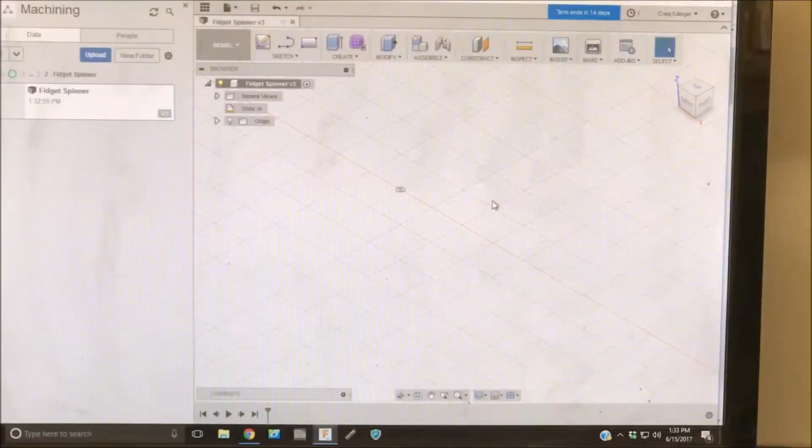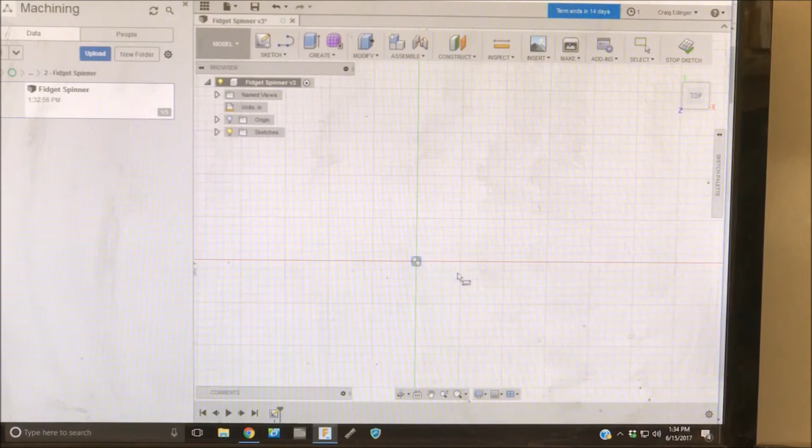Okay, so to draw this fidget spinner in Fusion 360, I'm simply going to go up to Sketch, Rectangle, 2-Point Rectangle, or you can just click anywhere and hit R. And I'm going to select this plane right here. Then I'm going to click in the origin point right there, drag down. Over here, I'm going to go 1.25 tab, and then I'm going to go 2.75 and enter.

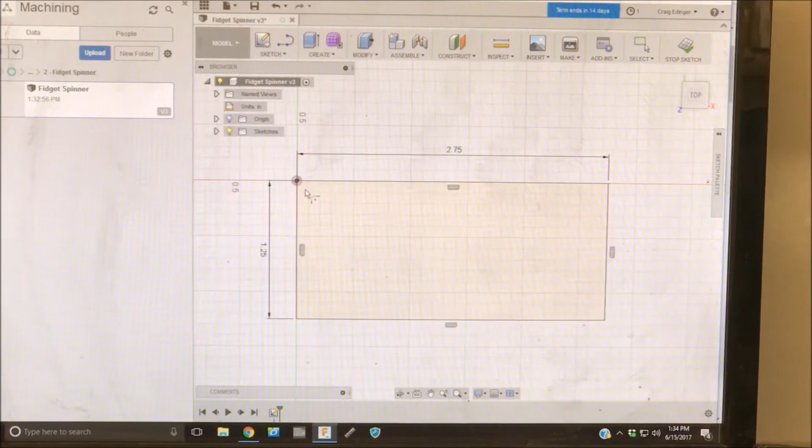Now I'm going to go to Sketch, Fillet, select this point right here, enter 0.625, enter, repeat fillet, 0.625, enter.

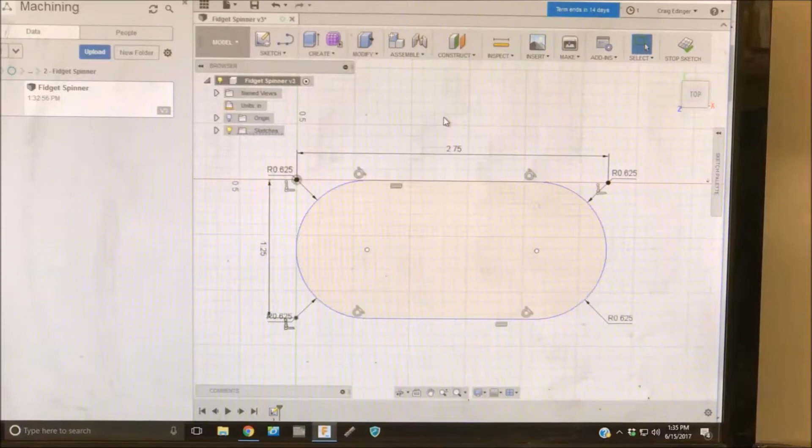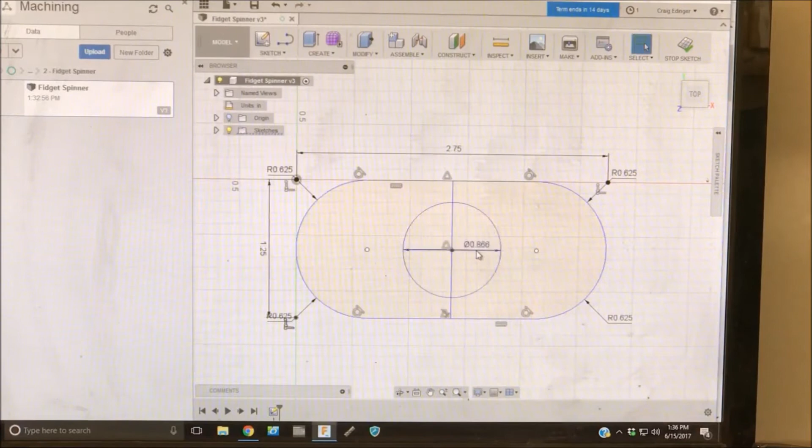Alright, now I need to make the hole in the center for the bearing. So I'm going to go line, find the center point there, center point there. Then I'm going to go C for circle, find the center here. That's going to be 0.8661, which is 22 millimeter. Enter, enter. I'll delete this line.

Now I'm going to hit the home up here, right click, press pull, select here. I'm going to go 0.2756, which is 7 millimeters, the thickness of the bearing.

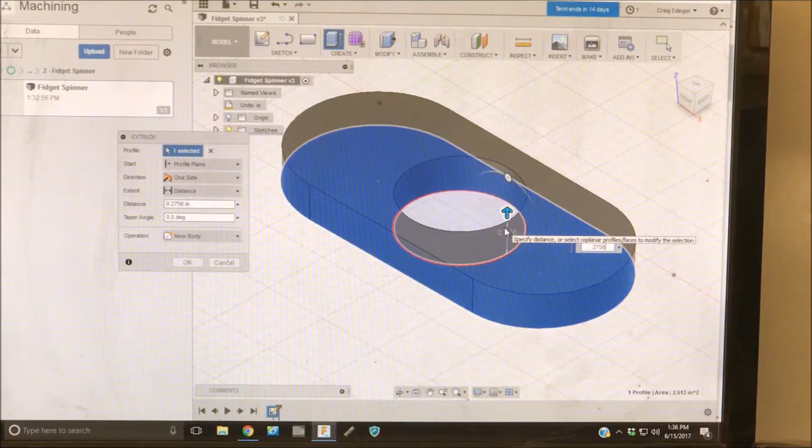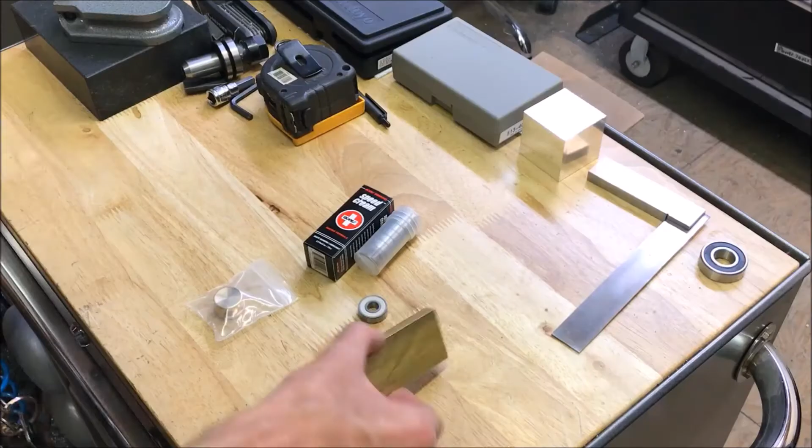Enter. Now to make it look cool, I'm going to go to Modify, Physical Appearance. I already have brass up here, but it's under metal down here, so I'm just going to drag brass onto here and close.

So the parts I'm using in this project is machinable brass. This is 3/8 inch thick by 1.5 wide by 3 inches long. Actually it's 2.9 because I have a 12-inch length that I want to cut in 4 pieces.

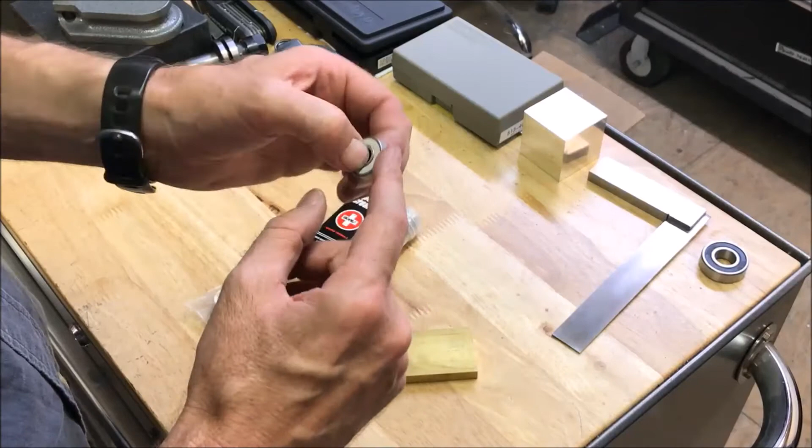Also a 608 bearing. This is actually a hybrid. This is chrome. I wanted to get stainless, but I ended up getting chrome with ceramic bearings. We'll see how that works out. Actually got an 8-pack. My son rides a skateboard, so he gave me some Bones Speed Cream. It's not cream, it's actually oil. I'm going to end up cleaning the grease out of this bearing and putting this oil in instead.

And I got this button. If I had a lathe, I could have just machined this, but I ended up buying it. This is a brass button. It just slides in there. It's the screw type. Like that.

Alright, I got the brass from McMaster-Carr, and this piece here worked out to be about $8. You could probably find this cheaper if you go to like a local metal shop and they have some scraps and stuff. The bearings ended up working out to be $2.50 a piece. You could spend anywhere from like 50 cents up to like $15, depending upon what quality of bearing and how long you want it to spin. The bearing was off of Amazon. The button, I don't remember how much that was, but that was off of Amazon also.

So now I'm going to go into CAM, Setup, going to go into Stock, going to go to a fixed box size, and I'm going to set the width, or the X, at 2.9, and the depth, which is the Y, at 1.5. That's correct. The height, I'm going to put that at 0.375 for 3/8.

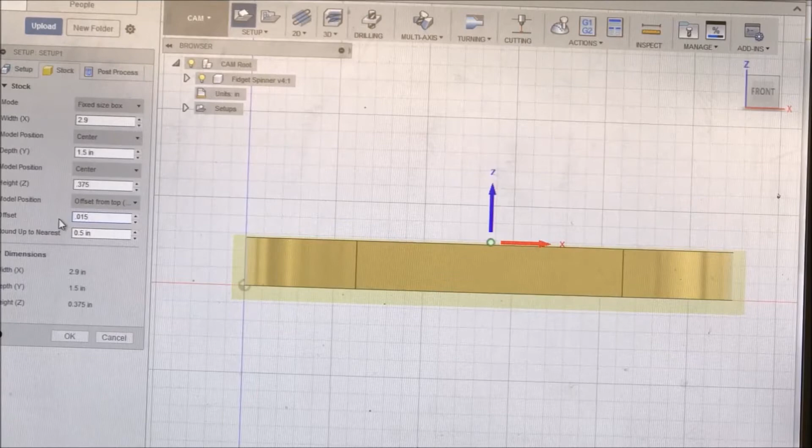On the model position, I'm going to go offset plus Z. Over here, I'm going to click front, and I can see where my material is, my box size in relationship to the part. I'm going to set that offset at 15 thousandths, 0.015. Click OK. Now when I zoom in here, I can see there's 15 thousandths left right there. That's how much I'm going to shave off the top of it when I'm facing on the first op. Alright.

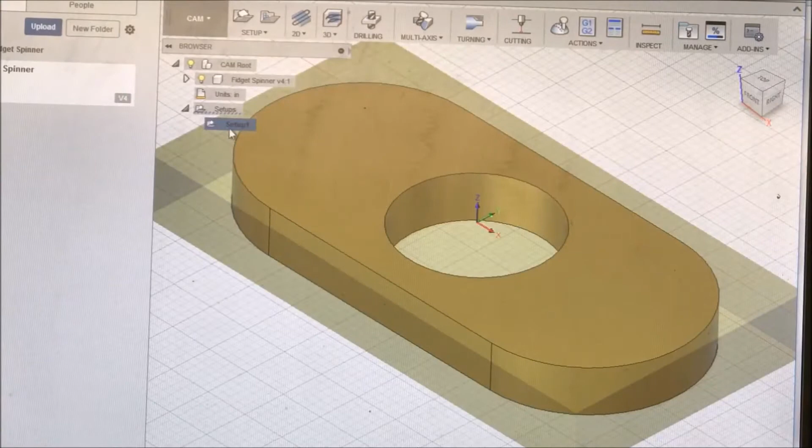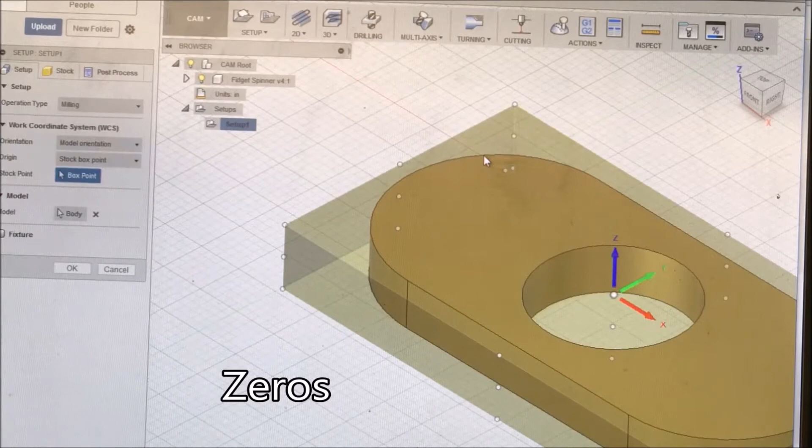Oops. I'm going to go back and edit that. I'm going to go to Setup, Model Orientation. That is correct. The orientation of the XYZ is proper. Stock box point. It's asking for the point where I want to set my zeros. I'm going to set my zeros in this bottom corner over here. I'm going to shift, push down the scroll wheel to spin it around so I can see it better. I'm going to select that point right there. And that's it. Click OK.

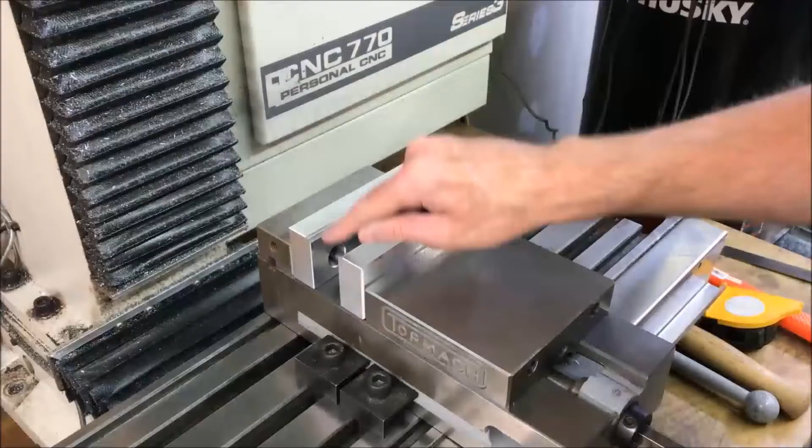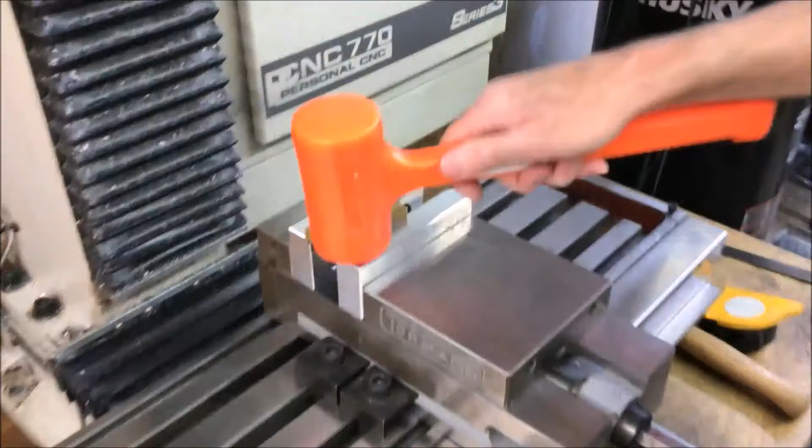Okay, I've gone ahead and double checked the jaw was all cleaned out, cleaned the bottom of this part. Now I'm going to set it on the upper jaw. Make sure it's seated down there. Feels like it's gripping pretty tight. Alright, now I'm going to go ahead and set my zeros on this corner back here and also on the bottom of the jaw here for the Z.

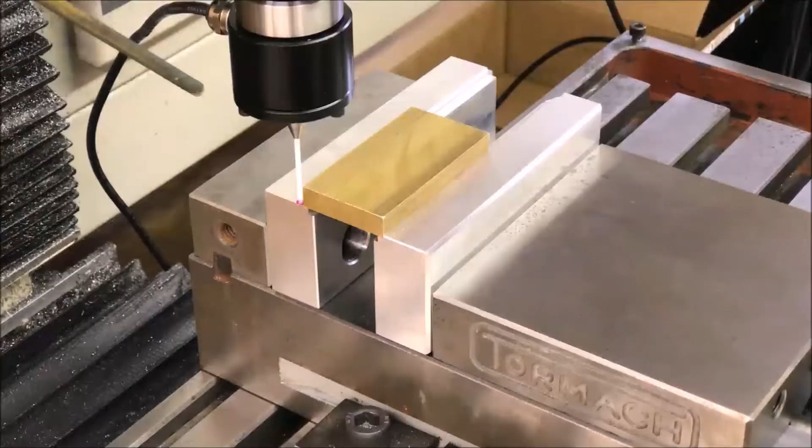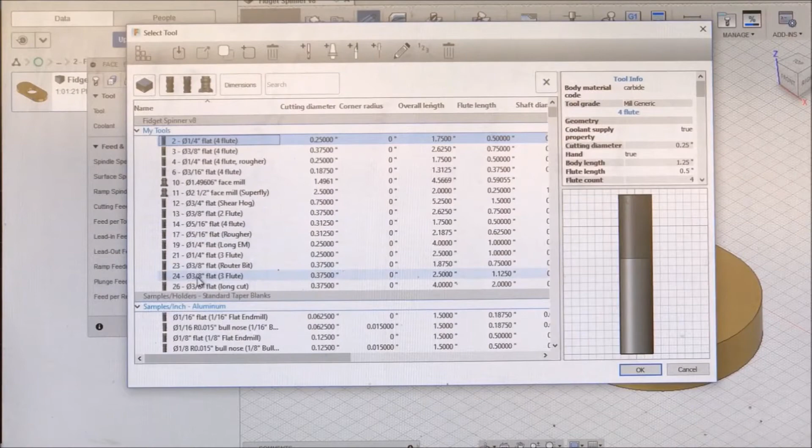Okay, now the first fidget spinner I'm going to machine is going to be at mini mill feeds and speeds. So I'm going to go to 2D face. I'm going to select my 1/4 4 flute carbide end mill. Okay.

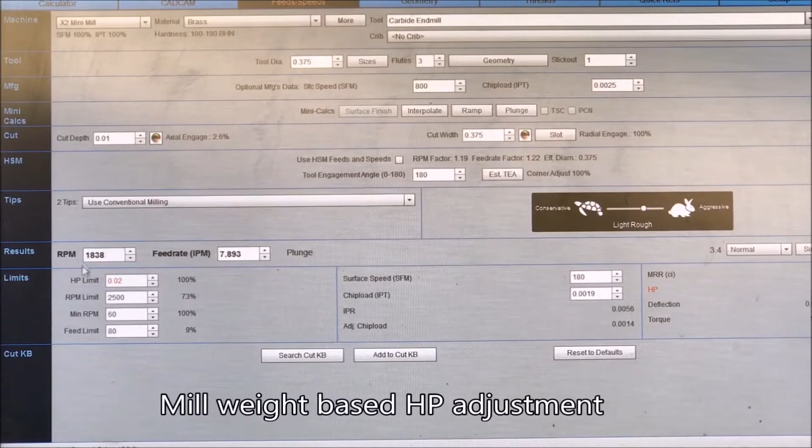Now I'm going to double check my feeds and speeds in G-Wizard. I'm using my X2 mini mill profile. Set it to brass, carbide, 3 flute, 3/8. I'm facing, but I'm only going to be facing 10 thousandths and then 5 thousandths in 2 passes. So it's 10 thousandths at full width of cut. It's suggesting in brass 1800 RPM at about 8 inches a minute.

So I'll go here, change this to 1800, cutting feed of 8 inches a minute. I usually just like to make these half. A lot of these aren't actually going to be used, but. And go to geometry. It's already automatically selected the geometry. On my heights, stock top, bottom, model top. That looks good.

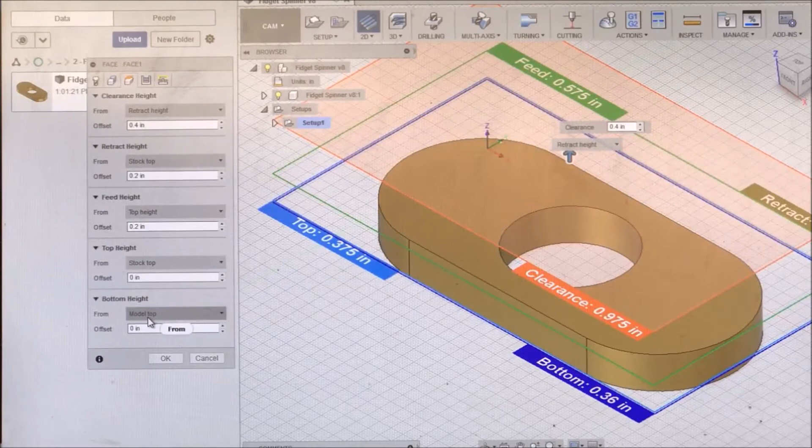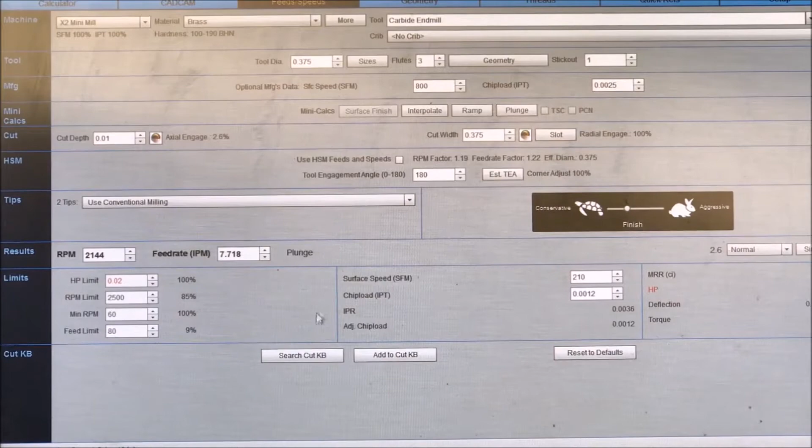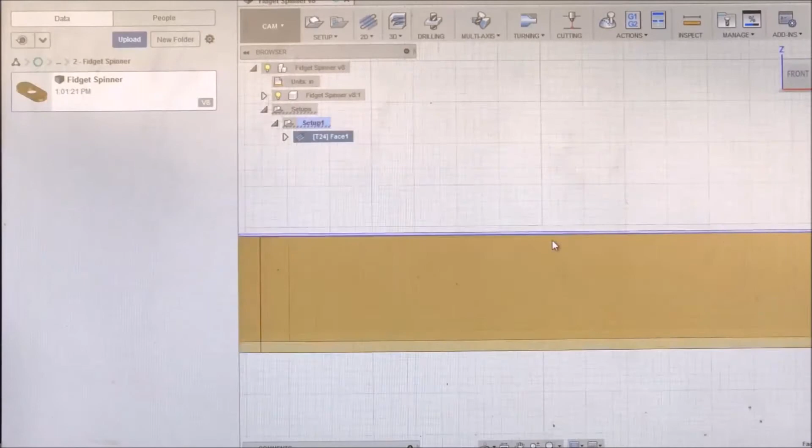On passes, I'm going to go multiple depths. The first step down is going to be 10 thousandths, and the finishing step down of 5 thousandths. And a feed rate. Select finish at, it's about the same at a higher feed rate. I'll just leave it the same. Okay, linking. Don't think I need to do anything there. Click OK. Go to the front, I can see my 2 passes right there.

Alright, okay, I've loaded my code up. I've set my tool to tool 24. Double check the height offset on the height gauge. Did a sanity check to make sure my zeros are set properly. And ready to go. All right.

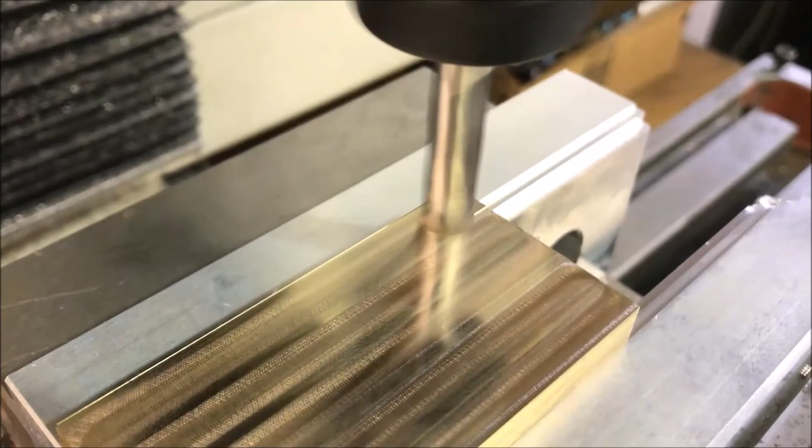Well, it turned out pretty smooth. There's a bit of a burr on the back edge over here. I went ahead and used the deburring tool to clean that off and clean off the other edges. Now the next step will be to mill this outer portion right here. To do that, I will go to 3D adaptive clearing. I will use the same tool, and I will double check in G-Wizard.

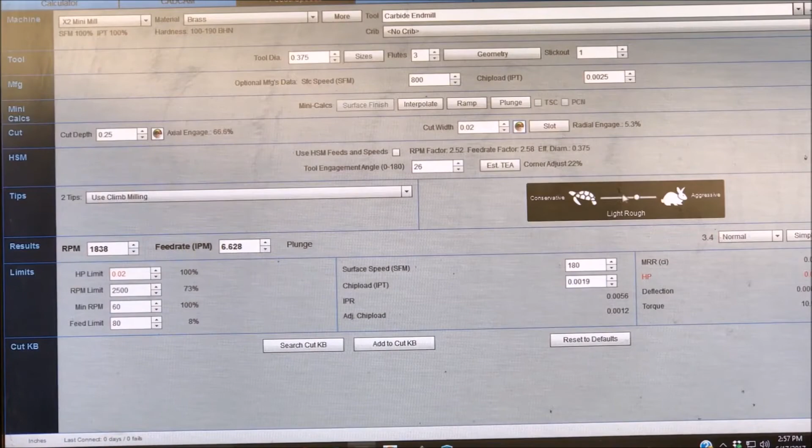Same settings, except I've increased my depth of cut to 0.25, which is approximately, I set it at 20 thousandths optimum load or width of cut, which gives me 1800 RPM at about 6.5 inches per minute at light rough. Go 6.5. I'll just put this at 3, 3, 3, 3. And my geometry is set automatically already based on the stock.

And on my top height, I will put model top. And on my bottom height, I will put model bottom. The bottom is about 84 thousandths, so that should give me plenty of room for where I'm gripping it on the bottom. The soft jaw is 50 thousandths, so that gives me some room there.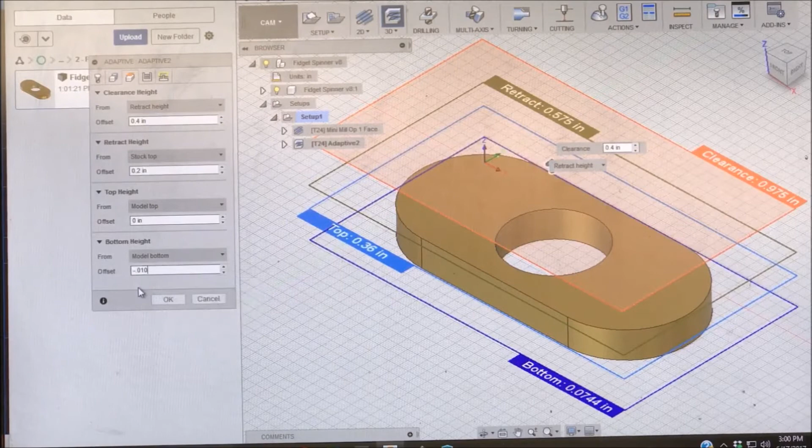And I will go to the passes. I will put my optimum load at 0.020. Enter. Stock to leave. I will leave radial stock of 10 thousandths, 0.010. That's on the sidewall. Axial stock, I don't need to leave any axial stock there. Set that to 0. On my bottom height, I'm actually going to offset that by 10 thousandths of an inch, negative 0.010. It sets it down a little bit more.

Click OK. And it looked like it actually gave us this inside part here too. Okay, well the ramp angle is only 2 degrees, and our ramp feed rate is only 3, so it should be okay. It's leaving 10 thousandths of an inch of stock on the walls here, so that should be okay. This internal diameter here has to be done carefully to make sure that the bearings fit in there snugly. So the finish pass here and on the inside will be done separately.

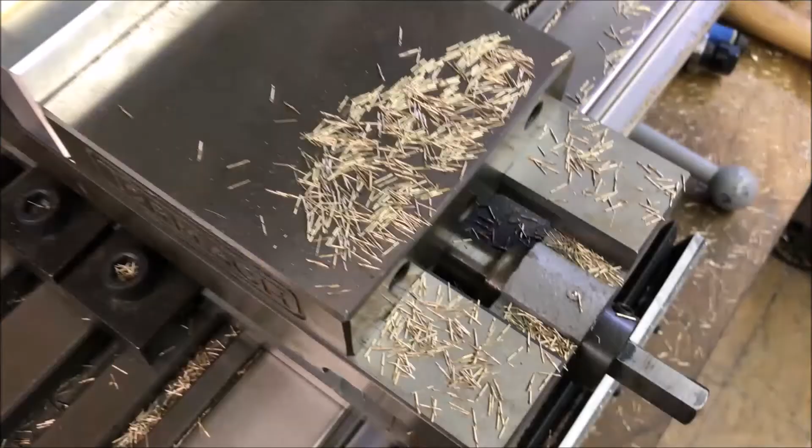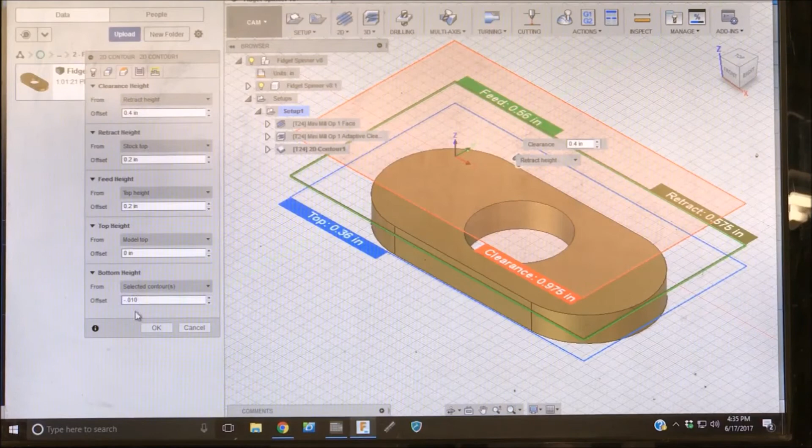Now I'm going to do a finish pass along the outside here. I'm going to go to 2D contour. I'm going to go at the same feeds and speeds. Geometry, I'm going to click this line right here. The heights, model top, selected contour, that's fine. Again, I'm going to go negative 0.010 on the bottom. Let's see, climb milling, no roughing passes, no multiple depths, no stock to leave. That should all be fine. Click OK.

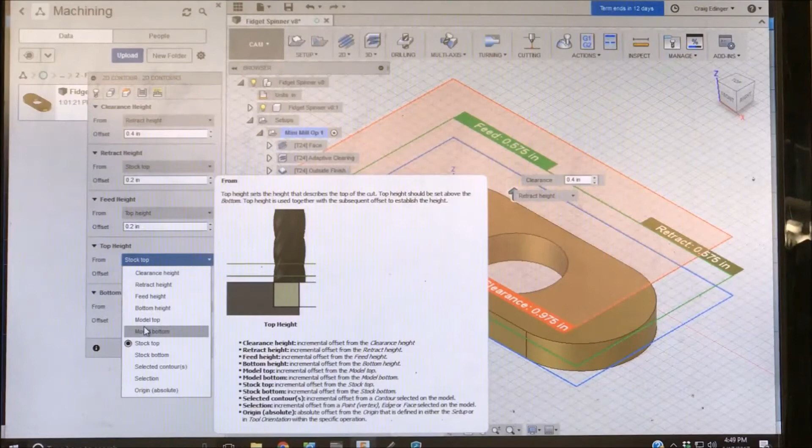Now I'm going to do the same thing with the inside, but I'm going to take it in multiple steps. First I will select 2D contour, same feeds and speeds. I'll select the inside here. On heights, go model top, selected contour, again minus 0.010.

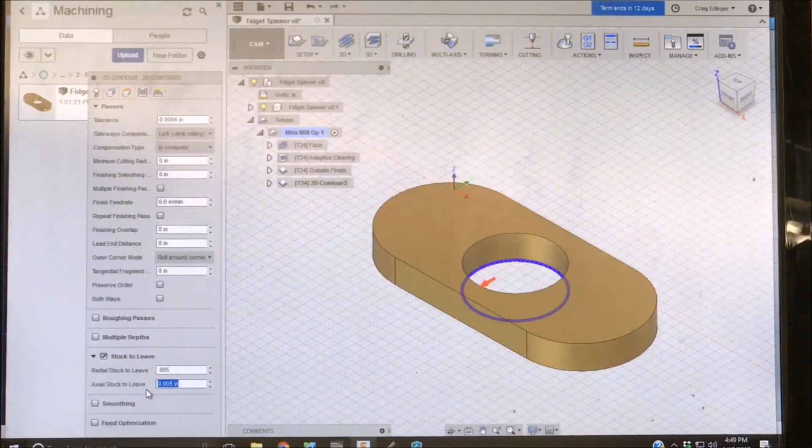On stock to leave, I've got 10 thousandths left there, and I'm going to take off 5 thousandths. So I'm going to leave 0.005. I'm not going to leave any axial, just on the wall. And the linking should be good there. Select OK. Oh.

Zero. Click OK. Now I'm going to do the same thing, but I'm going to take this in multiple passes and kind of sneak up. So I'm going to have 2D contour with a 5 thousandths, then maybe make the next one 3 thousandths and 2 thousandths, and just kind of sneak up on it on different ops there.

Okay, so I set the finish passes at, for the inside, the first will be 5 thousandths cut. The next will be 3, 1, and 1, basically sneaking up on it. There may be a better way to do this than I'm doing here, but I'll try this for now, and if anybody has any recommendations of a better way to sneak up on it, let me know.

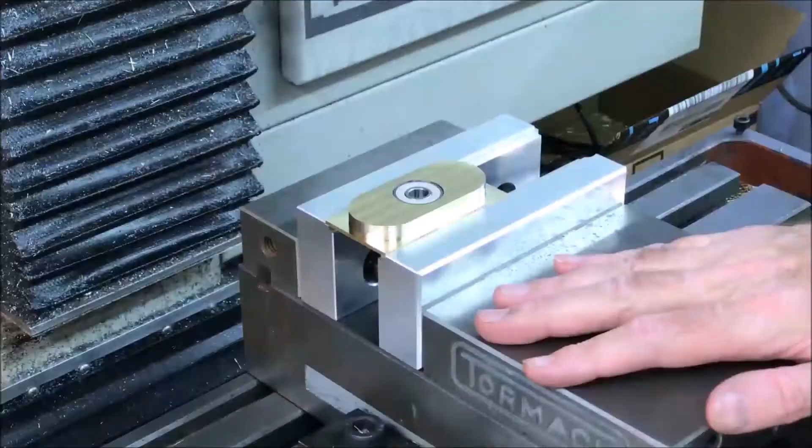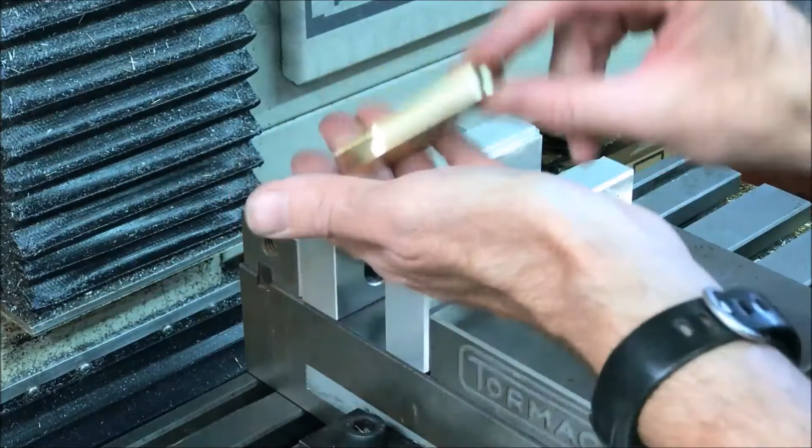Okay, well, it went about 1/1000th of an inch or so too far, and the bearing went in there. I should have stopped at the last one, or tried to press fit it. So, anyways, I'm going to keep going. I'm going to turn this over. I'm going to flip it over, set my zeros again, and do the facing on the other side. I'll just have to, I don't know, maybe glue it in or something. It doesn't want to come back out.

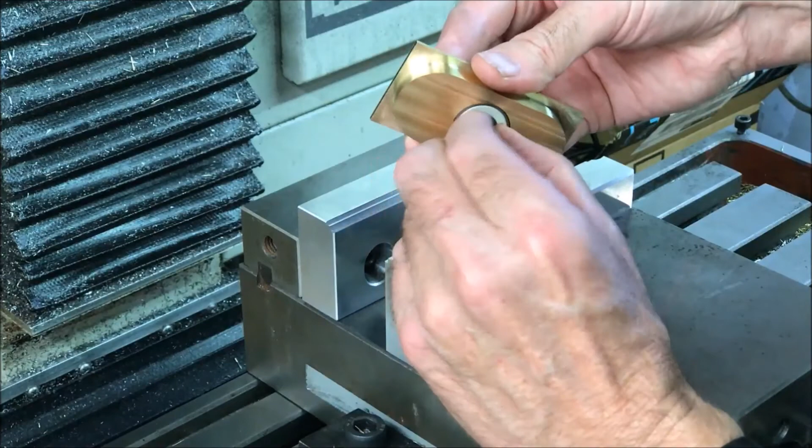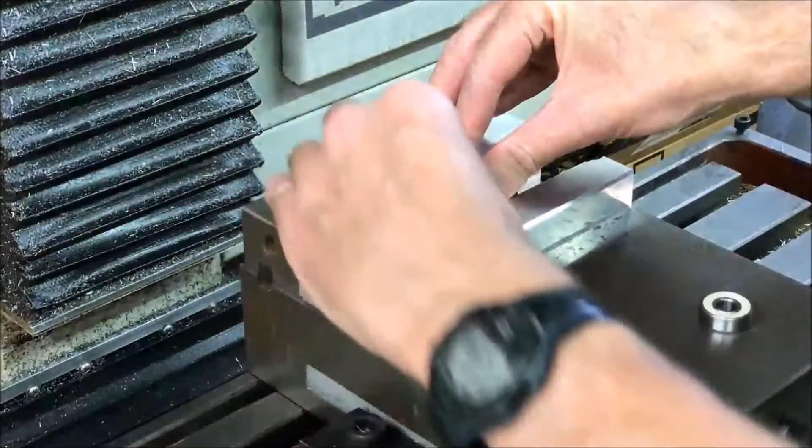But there's definitely too much play in there to use it like that as a fidget spinner. It needs to be pressed in. Maybe I can glue it or something. Alright, so I'll flip this over. Face off the other side. And see what we can do about making it work. So my zeros on the jaw here are fine. I'm just going to reset my zeros on these two since it's actually moved, since it's smaller on the bottom.

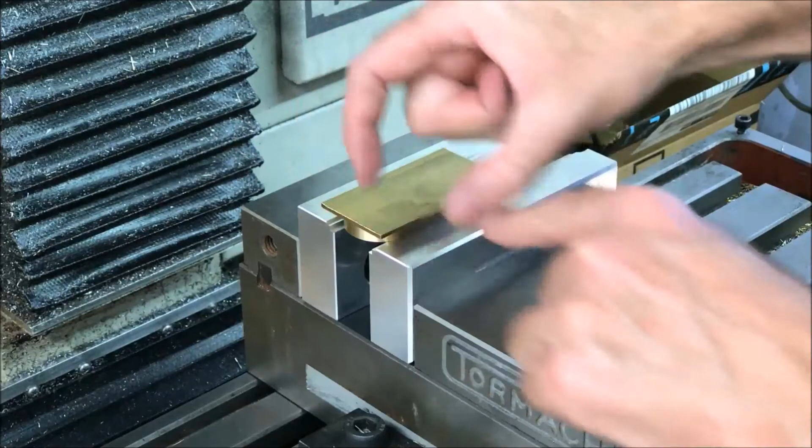Okay, now that the first operation is done, I'm going to go on to the second operation. Click Setup over here. Go to Stock. Change this to Fixed Box Size. This will be 2.90. Y will stay the same, 1.5. Z was 3/8 or 0.375, but I took 15 thousandths off, so it's going to be 0.36. I'm going to offset from the bottom by 0.

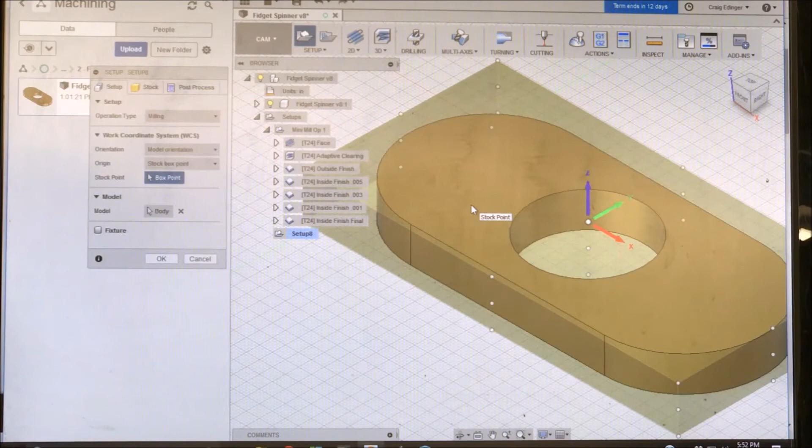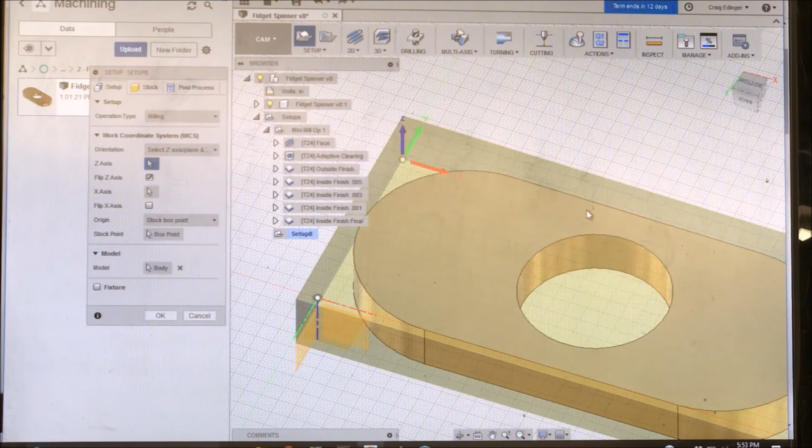I'm going to go to Setup, and it's asking for the box point. I'm going to hold my shift key down and push the scroll wheel down and hold, and rotate this back this way. And I'm going to be setting my zeros on this back corner over here. And I'm going to flip my Z by clicking on the arrow right there. And I can click the back button right here to confirm that's where I want it. See, I've got the extra stock on the top there.

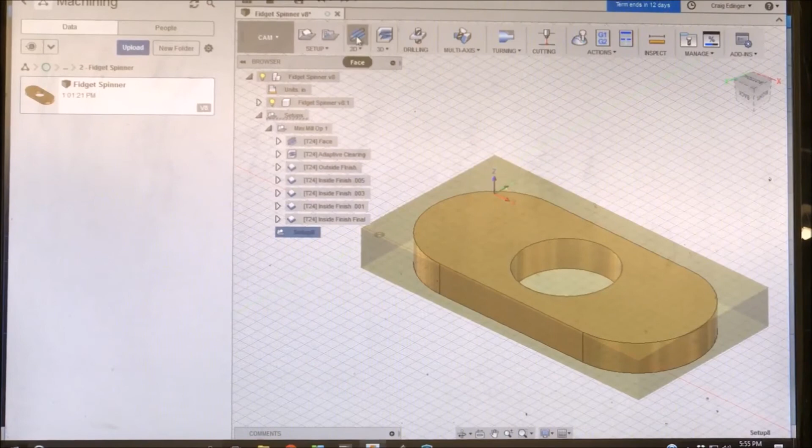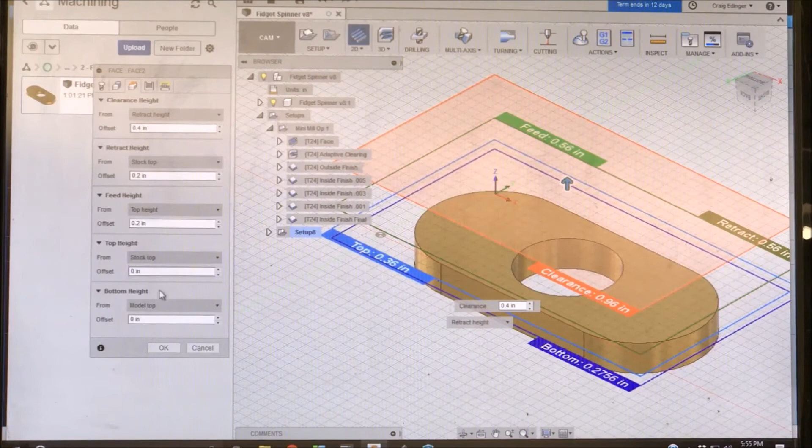And click OK. Okay, now I'm going to create a facing operation for this setup. So I'm going to click 2D and facing. I'm going to leave the feeds and speeds the same. It's already selected the geometry. I can tell from my heights that I'm starting at 0.36, which is correct, and the bottom will be 0.2756, which is exactly the thickness of the bearings. So that all looks good, and I'm going to go to passes.

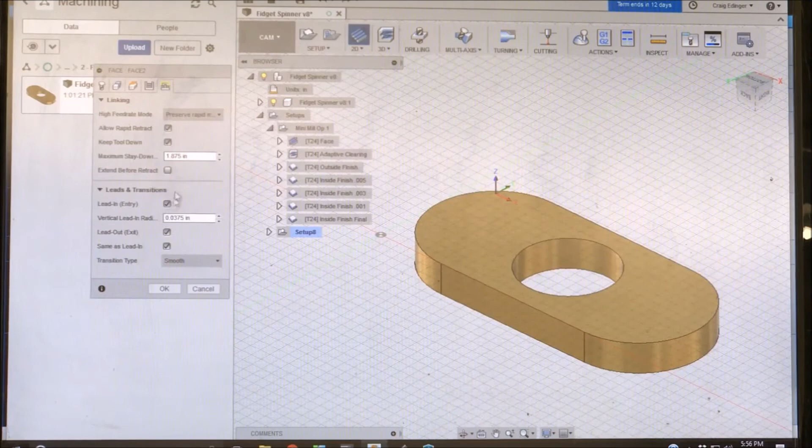I'm going to go multiple depths, and I'm going to go 10 thousandths depth of cut. And a finishing step down of 10 thousandths at the same speed. Transitions should be fine. They worked on the facing on the top. And that should be good.

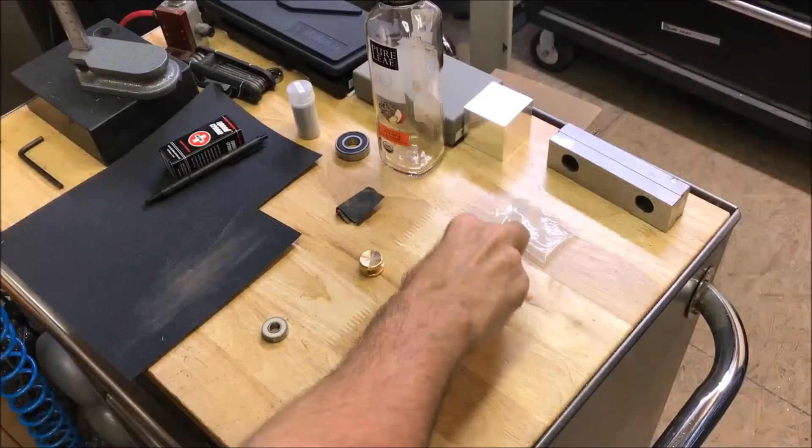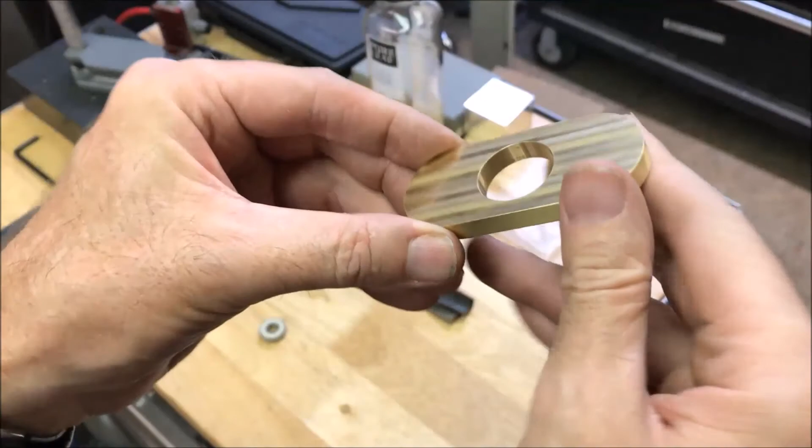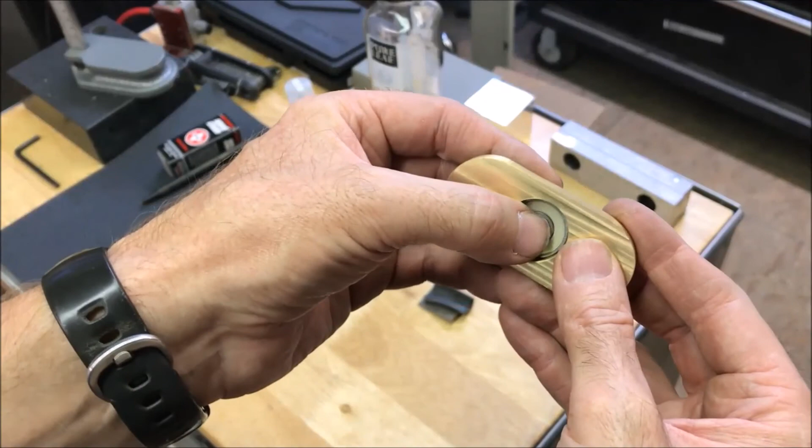Okay, well there it is. Take it out of the vise and clean it up and see what it looks like. Okay, well I cleaned it up with some 180 grit sandpaper to take off the sharp edges on the inside and the outside. I think it turned out pretty good looking. Of course, the only problem is the bore there is slightly too big. So, yeah, I guess it still kind of works, but it's a little too loose. I guess it probably should have been 1 thou less.

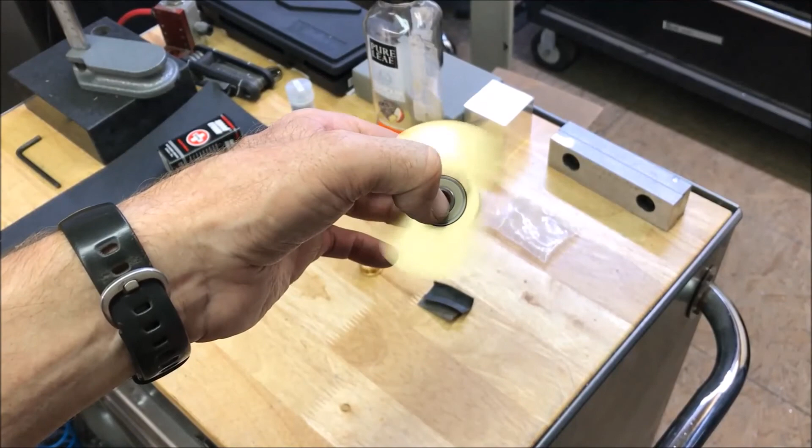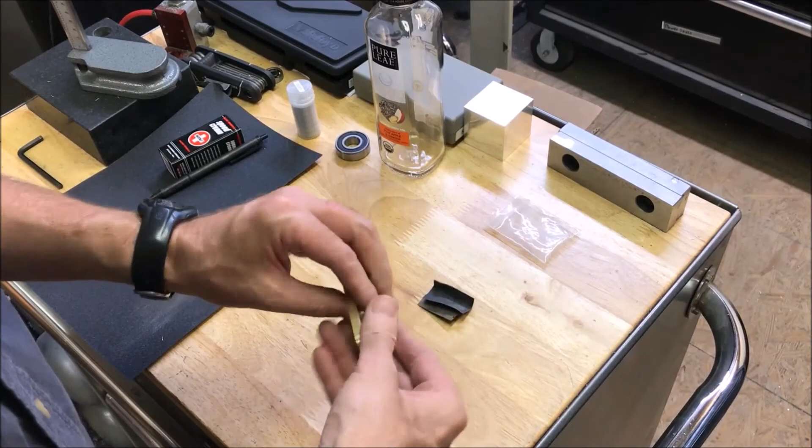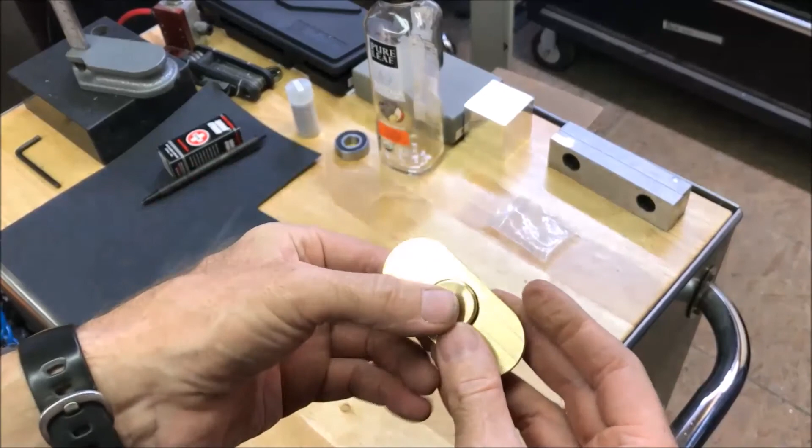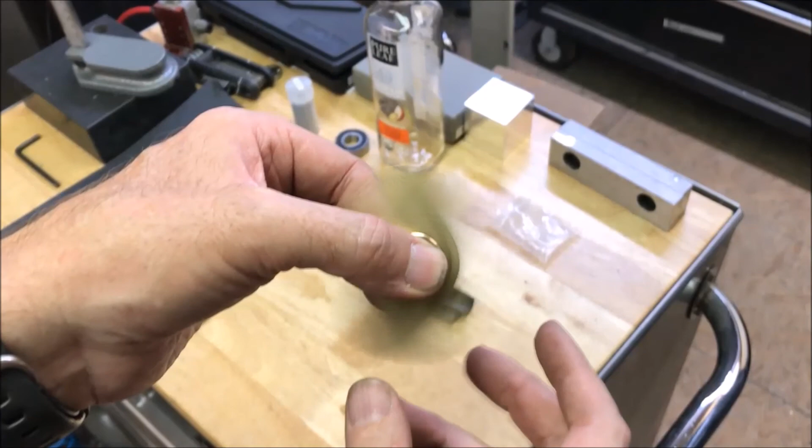At least it holds in there. Let me put the button on it. See how the final product looks. There. I have to hold it up this way because if I turn it this way, it tends to fall out a little bit. I haven't cleaned out the oil and added the bones oil yet, but I think it turned out pretty cool. Alright, well the next one I'm making, I'm gonna make it at a higher feed rate.